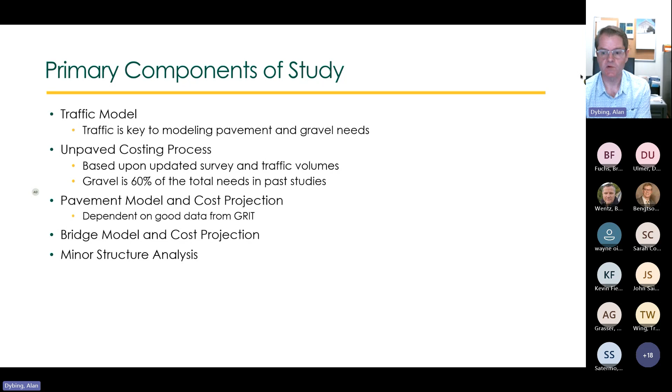First off, in the components of the study, the traffic forecasting. Roadway impacts, whether paved or gravel, are dependent upon traffic levels. So as traffic increases, unpaved or gravel roads require more frequent blading, more frequent and thicker gravel overlays, and, depending upon the location and the total volume of traffic, dust suppressant usage or base stabilization.

For paved roads, the pavement design is based upon the projected equivalent single axle loads. So that's a measure of pavement damage typically related to axle weights. And the higher the ESALs, the thicker the pavement will be, and the quicker the deterioration on that paved road will occur. So to estimate and forecast traffic into the future, we developed a travel demand model.

And since the focus of this study is county, township, and tribal roads, we focused, and have in previous studies, on agricultural and oil-related data for forecasting truck volumes for those groups over the next 20 years. From the ag industry, the agricultural production, we looked at National Ag Statistics data, as well as the grain movement database from the Department of Agriculture.

And for oil, we worked with Lynn Helms and Justin Kringstad from the Industrial Commission to develop forecasts of development in the future. And essentially, we then model traffic across the state and compare that against observed traffic counts and calibrate the model based upon observed counts.

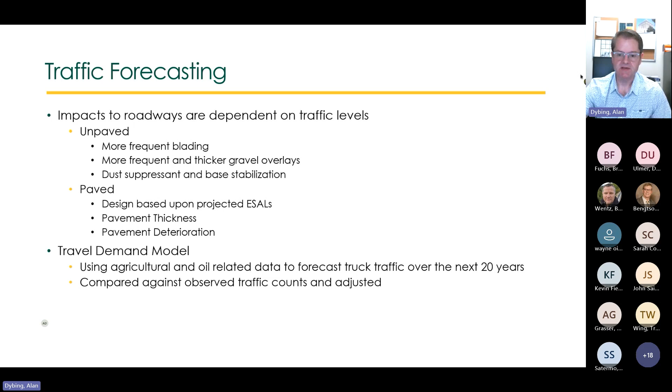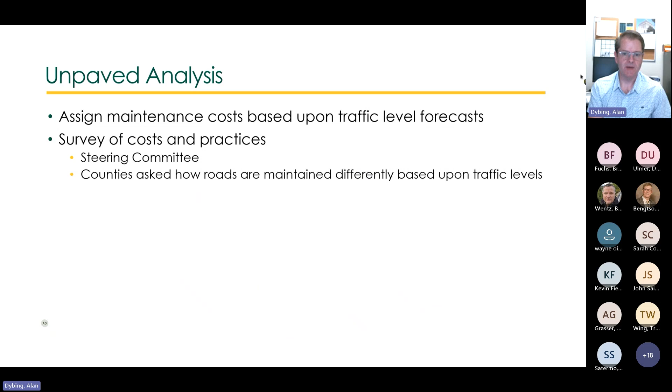So in terms of the first set of analysis here, the unpaved or gravel, to simplify it, we assign maintenance costs based upon traffic level categories. And we do the cost estimation based upon a survey of costs and practices, which has been developed and improved over the course of the recent studies using a steering committee of counties and townships. And in this survey, the counties are asked how roads are maintained differently based upon traffic levels. So they're telling us essentially how they treat their roads differently based upon traffic.

The survey includes a number of major areas. First, in terms of the aggregate, what type of aggregate, using specifications or testing in that aggregate. The big one, the unit costs. How much are you paying per yard or per ton for gravel? Blading costs, and also the hauling costs. And depending upon the county, that hauling cost is a significant component. You could have relatively cheap, low cost gravel per yard, but if it's located on the other side of the county, then the freight in many cases is higher than the actual cost of the gravel itself.

Overlay thickness and frequency. So how often do you apply a gravel overlay, and how many inches of gravel do you do when the overlay is applied? And also how they vary at different traffic levels. Same thing for blading frequency. How many times a month do you blade the road, and how does this vary at different traffic levels? Whether the county uses dust suppressant or stabilization and the costs associated with that.

So the gravel survey was mailed to all 53 counties and roughly 1,300 townships across the state. And this year 52 out of 53 counties responded, 98%, and just a little over half of the townships responded. So we had a lot of data that went into this study. And just one of the data items here is the cost of aggregate per cubic yard.

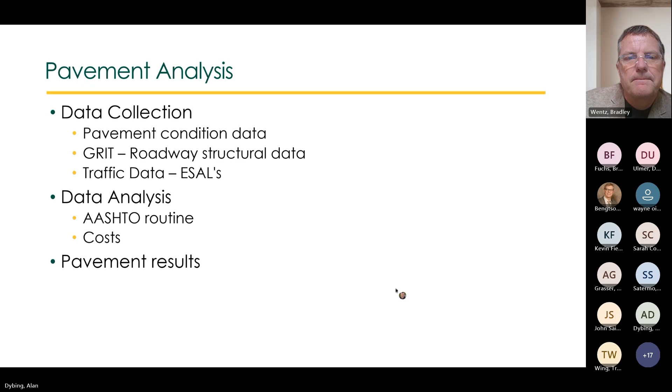The data analysis is really based on an AASHTO 93 design equation that we use to predict what the future condition will be, and then we take into account the costs, and then lastly I'll cover the pavement results. So the big one is pavement condition data, where we need to get a real-time snapshot of what that is recently. So in 2022 and 2023, we collected pavement condition data using students that we have in our DOTC program and ATAC program.

This year was a little bit different in that we purchased a new portable profiler, and this is an upgraded profiler that's laser-based, and it has GPS. It more accurately measures the roughness of the road. In the past, we would use smartphone devices and a program called Roadbump, which did a good job of measuring it, but it's not quite as accurate as it's using just the accelerometer within the smartphone to measure how rough the road is. The picture on the right shows the portable profiler. It's just mounted on the back of a vehicle and can be taken on and off. And pretty easily we can cover the state with that system.

And we collected the entire state in 2022 and 2023. Just the northeast corner was done with Roadbump in 2022, and then in 2023 we covered the whole state with a profiler. But when we collected with a profiler, we also included the Roadbump device in there so that we could calibrate the 2022 Roadbump data up to similar results that we were getting with the new profiler. We also collected images every 500 feet with a camera and an application that we have in the vehicle.

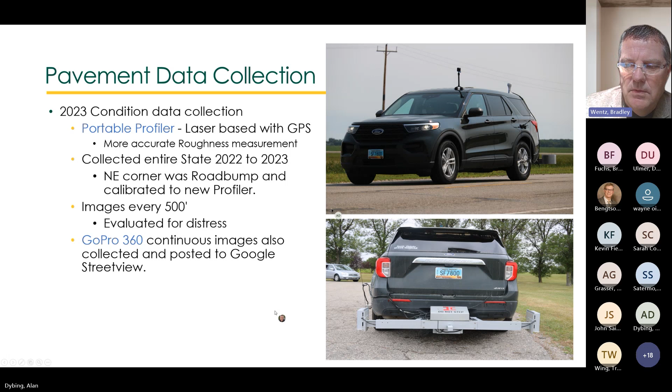I got a delay in my forward button here, but there we go.

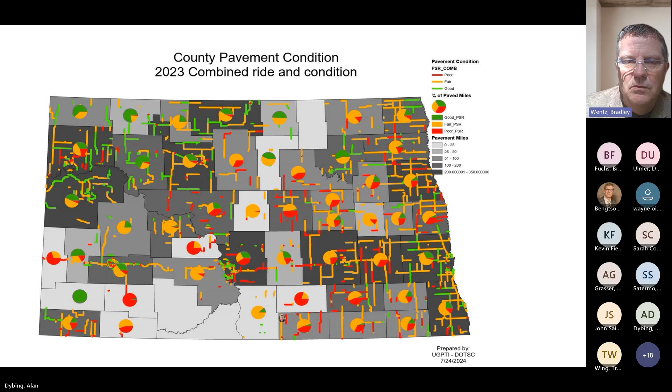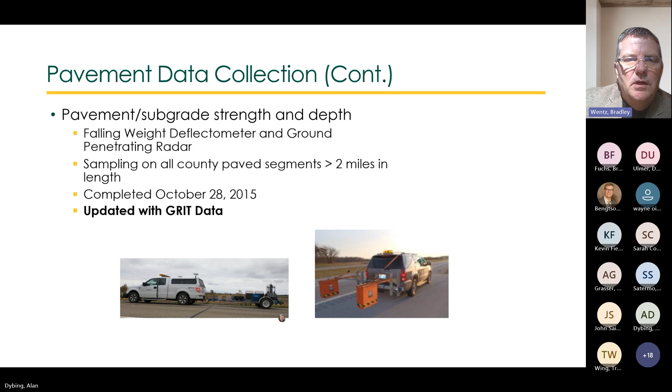So the other thing we need to have is a pavement subgrade strength, and there are some cases where we don't have enough information in GRIT to determine that. And so then we go back to some data collection that we did in 2015, as subgrade strength probably hasn't changed much since then, unless there was a new construction project, in which case we would have that information in GRIT. So we fill in where we don't have enough information from that older FWD data that we collected.

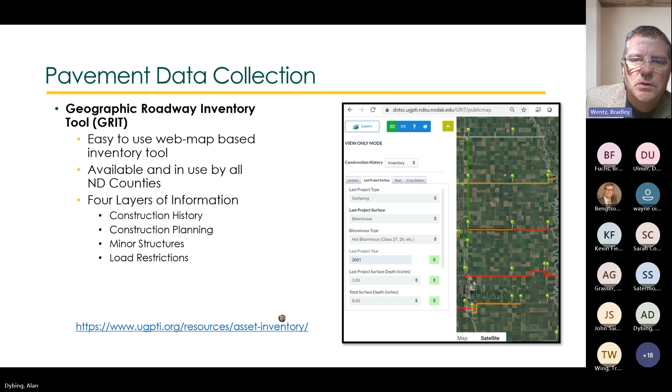And then the next part is the Geographic Roadway Inventory Tool. It's a really easy to use web-map based inventory tool. It's available and used by all the North Dakota counties. And we have 4 layers of information in there. The big one we're using for the needs study is the construction history, but also for the county's planning purposes, there's a construction planning layer. There's a minor structures layer, which Kelly will talk about a little bit later. And then load restrictions are available in the GRIT system.

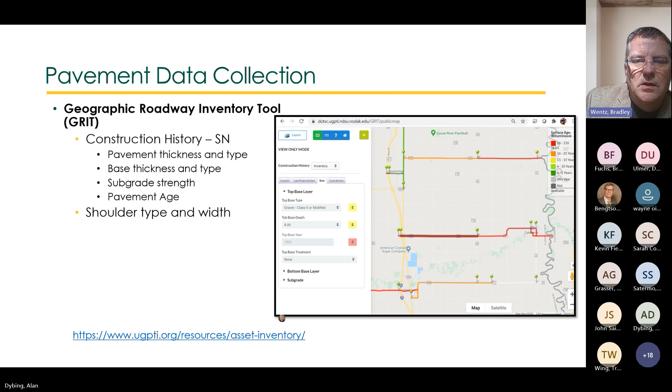So from GRIT, what we really need from the counties and what we get from them is the information to determine the structural number, basically the strength of the roadway. And that's the construction history layer. In there we have pavement thickness and type of pavement, base thickness and type, subgrade strength, pavement age. And all those things are used to calculate the structural number, or the strength of the roadway. And then we also collect shoulder type and width. That's also used in some of the determinations of projects.

And then the second map here is the structural number. Again, this is kind of the strength of the roadway, and it's taken from the GRIT information. The red in this case is showing the pretty low structural numbers. So if you have a really low structural number and really high traffic, that road is probably going to need to have some reconstruction on it soon.

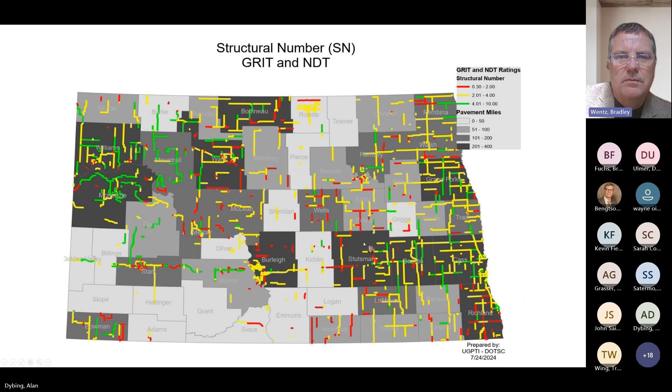So the pavement data analysis then is we're using an AASHTO 93 pavement design model. The inputs for that we need to have are the pavement condition, or PSR, pavement serviceability rating, and that gives us the initial pavement condition of the road, the cumulative ESALs, truck traffic, the structural number, roadway strength, and the subgrade strength or resilient modulus, and then shoulder width. And all those inputs, they get plugged into the model.

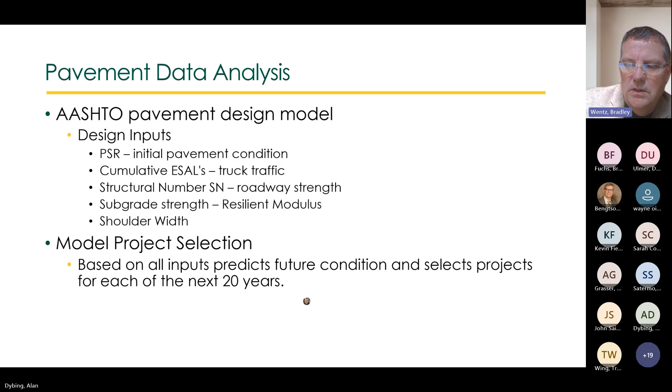I'm not going to show the equation or the math or anything here for time purposes, but based on all those inputs, we predict the future condition of the roadways and select projects for each of the next 20 years. So every year it runs a calculation going out 20 years and determines what the condition will be and what projects will be needed. And then we have to apply pavement cost to that to get the total needs.

And so we're showing here, bituminous overlay is around 200,000 to 550,000 per mile. Total reconstruction about 1.75 million per mile. Mine and blend or reclamation is about 840,000 per mile. And then widening overlay adds about 108,000 per foot width of overlay. And then concrete pavement repair is about 560,000 per mile.

These are based on looking at bid projects recently in North Dakota on county roads, and then also looking at the Federal Highway Construction Cost Index to determine how much they went up from previous costs that we used in past needs studies.

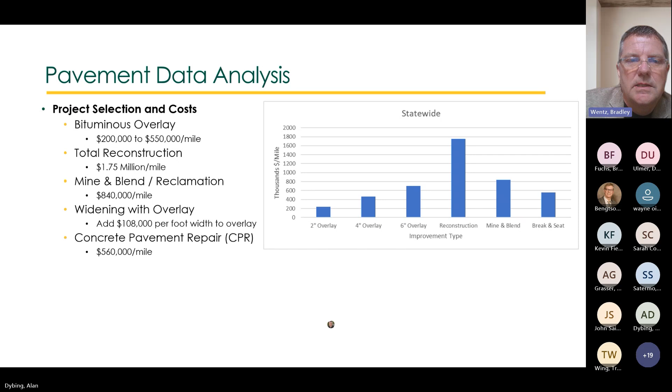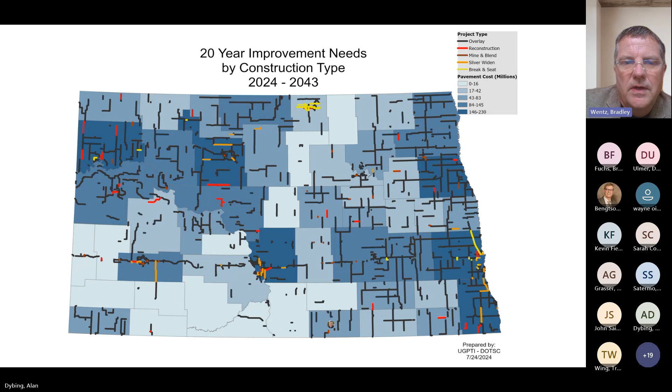I'm going to forward on to Kelly. Okay, thanks, Brad. Alan, you're gonna turn control over, then I can advance these slides. Yep, it should work right now, Kelly. All right, sounds good. Thank you.

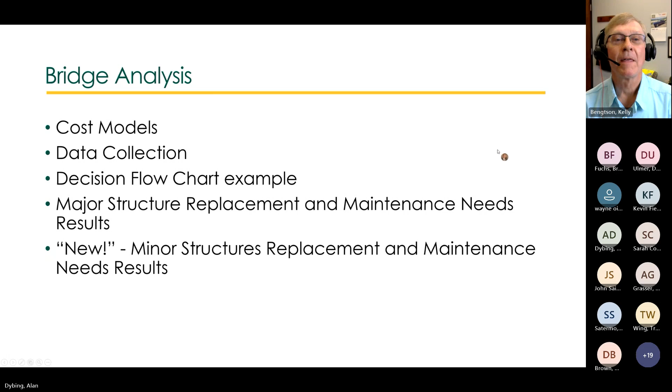Okay, so on the minor structures need costs, the costs are up significantly since the last study, about 41% increase.

You know, the previous study had bridge costs of $370 per square foot. Now we're looking at $530. Maintenance costs, we based that on the National Highway Construction Cost Index for all of the general construction components, and that was 16%. So maintenance costs are up from 30 to 35 cents per square foot for the off-system bridges and up to 40 cents a square foot now on the on-system bridges.

And then the box culverts followed suit with the major bridge structures, coming in about 41% higher. So what was in the previous study for a double box culvert was 450,000. Now it's 635, and you can see the increases for the multiple boxes as well.

So the box culvert guideline is if it's a bridge that has a span of 20 to 40 feet, then we're assuming we're going to put a double box culvert in there. And if the span is larger than that, we're looking at multiple boxes up in the bridge range of 40 to 50 foot spans.

There was one reduction, which is kind of unusual, of course, but the bridge length factor was reduced from 1.8 to 1.7. And what that means is the last study we used 1.8, and that's the old bridge length versus the new bridge length. And the majority of these, of course, the new structure is always longer because of instability in the banks of the water that it's bridging.

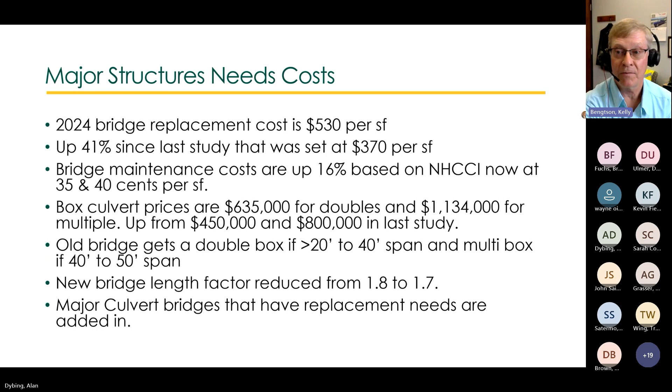And then major culvert bridges that have replacement needs are added in manually because the SAS code that we're using to look at the deterioration modeling of the major structures does not take into consideration criteria for buried structures. So the major culverts are included, and that was new in the last study 2 years ago. So we're continuing that.

So the major structures, like Al said, these are bridges that are greater than 20 feet in span. We look at the National Bridge Inventory. This is where all of the North Dakota bridge inspection data is sent into Federal Highway and then is posted on a public site. It's called the National Bridge Inventory.

So we started out looking at 2,795 structures. 716 of these were culvert structures, so those were included manually. And to qualify, they had to have a traffic count of greater than 50. And then the structures on minimum maintenance roads were excluded, and I believe there was about 179 of those that were excluded.

There's some city bridges that are included. Barnes County and Stutsman County have city bridges under their jurisdiction. So I want to thank Brian Fuchs for pointing that out, and those are included in the analysis.

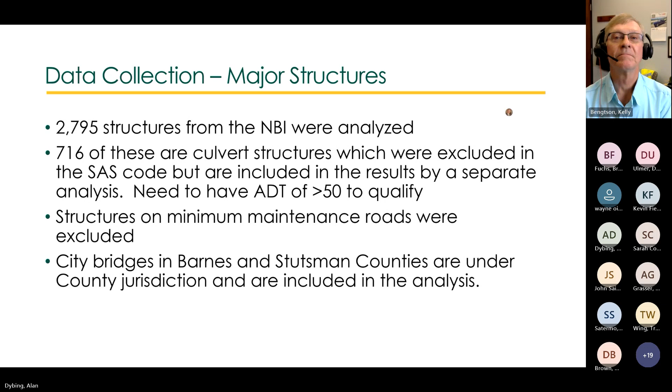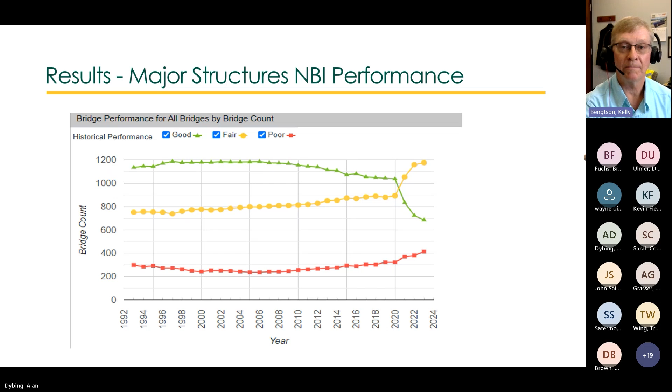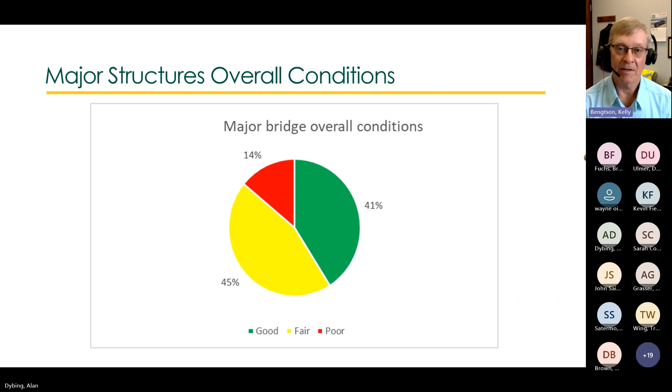And then this is a pie chart of pretty much the same data. 41% of the bridges are in good condition, 45% in fair. So here again, the fair bridges are exceeding the percentage of good bridges, and then 14% in poor condition.

So the results of the major structures in general, there's 847 major structures that are eligible for replacement needs, and this is up from the previous study, which had 698 major structures drawing replacement needs. And the bridge needs, including replacement and maintenance, are coming in at $1.087 billion, which is up from $715 million in the last study report.

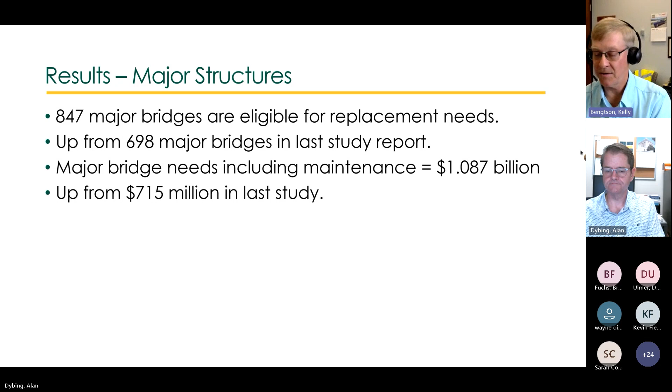Next, we'll touch base with the minor structures. So the primary source of data was the 1985 North Dakota DOT inventory. And it was an old version on green and white printer paper, so we had to actually put it into an Excel spreadsheet. And then we were able to import that data into GRIT.

We had some meetings with the Bridge Steering Committee, which is comprised of about 10 county superintendents and county engineers around the state of North Dakota. And it was decided to go with a span of 8 to 20 feet for structures to qualify for review in the minor structure needs analysis. So this data was then imported into GRIT.

Counties were asked to go into GRIT and approve these structures to determine if it was still there, is it still in service, what condition is it in, how old is it, verify the size of it, things like this. So we did create a tutorial video last fall.

The data was imported into GRIT in the spring of 2023, and there was quite a bit of information sent out to the counties to go in and do these approvals. So if the conditions were reported as fair or less, then it was going to be eligible for replacement. If no conditions were reported, then the replacement determinations were based on the age of the structure.

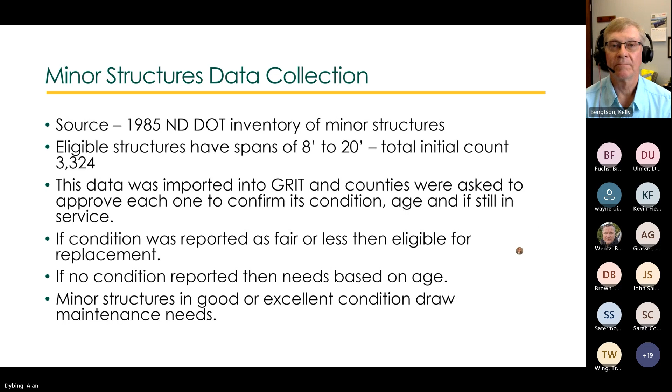So the minor structure cost model, and I want to thank Brian Fuchs from North Dakota LTAP for helping out with the cost model on this as well. The structures are broken down into 3 size ranges. We have the 8 to 11 foot span, the 11 to 15, and the 15 to 20 foot span. The steering committee also targeted a 50 square foot waterway opening as a minimum criteria to go along with these span ranges of 8 to 20 feet.

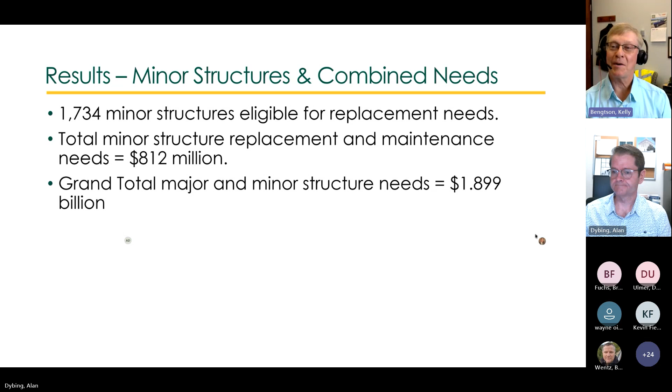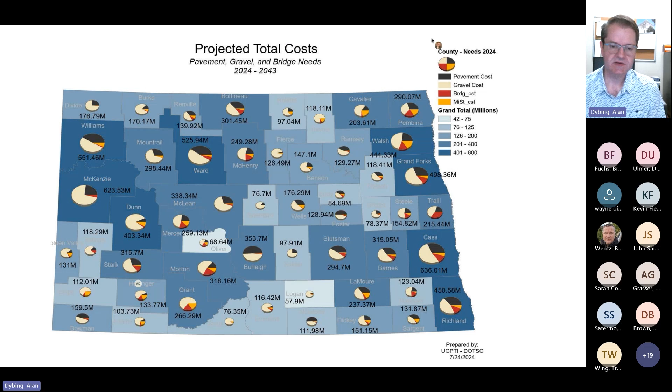So the draft report's going to go up here in just a little bit. We have to make just one or two additional updates to it, and we'll have that on our website. And then once the report is up, the comment period begins. So we encourage everyone to review the report and submit any comments or questions to us at ndsu.roadneeds@ndsu.edu. And the website for that is ugpti.org/downloads/road_needs. The comment period is open until September 15th. Based upon the comments, we'll make updates or changes to the report. And then October 1st, we plan to publish the final report on our websites, and the results will then be communicated to the legislature.